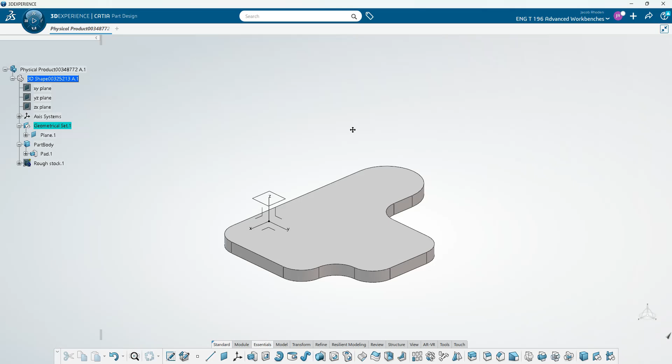This is Jacob Rhoden with part 1 of showing you how to do milling, specifically profile milling in CATIA 3DExperience.

So obviously here we have our kind of finished part. We can see all these curves on the side of this, and this is just a sketch I did with a pad. And then we have our safety plane right here in part design.

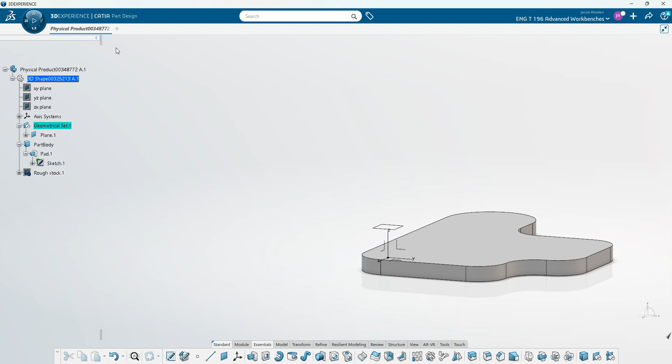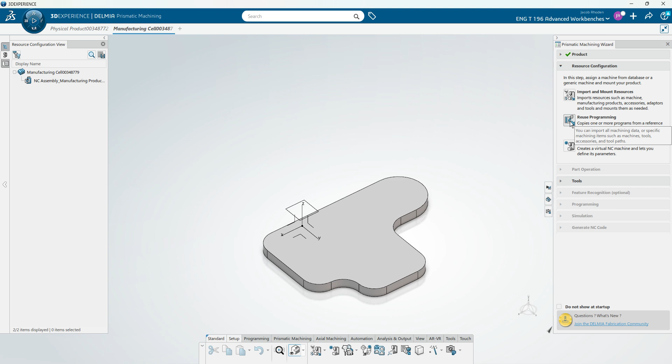Now what we're going to do, just like we did when we were doing drilling, we're going to go over to our prismatic machining. I already have it favorited, but you might have to go find it down in your apps. So we're going to open up prismatic machining, and it'll bring us to the same page as before, but since we're not doing holes, once we get down to tools and programming, we're going to have to change some things up. Starting out it's all going to be the same, so we're going to have another generic machine.

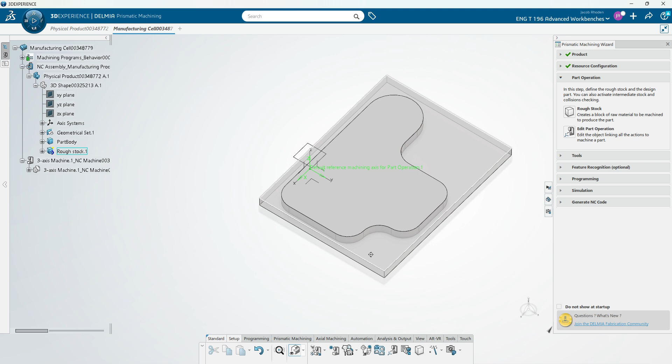And then rough stock, we already have a rough stock created, which I can show you right in here. If we do show, you can see it's the same process of creating a rough stock where you select the part body, and just for this, since we're going to be doing finishing on all of these sides, we want to make sure they're all being milled and cleaned up. I made this stock a little bit oversized so there was going to be material for this to cut, to make sure none of these sides were raw stock and not finished. So you can see I just oversized it a little bit. It's the same height, and maybe we can imagine this material has already been faced or something.

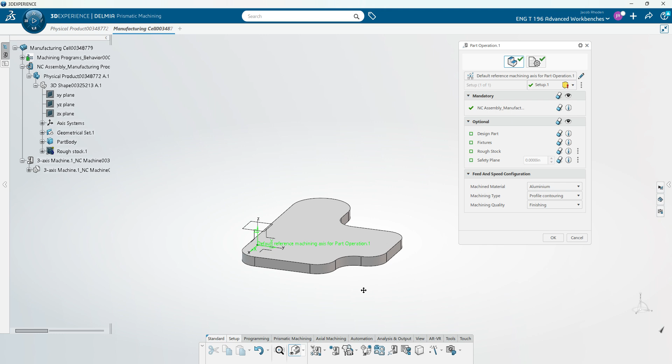So we'll hide that rough stock, but we've already got a rough stock, and we're going to do part operation. So we can see here we have our design part, which is going to be our finished part body. No fixtures. We're going to have our rough stock, which we'll select, and this is all the same process - using double click our safety plane, so we can select our safety plane right there, and got that. We're not going to offset anything.

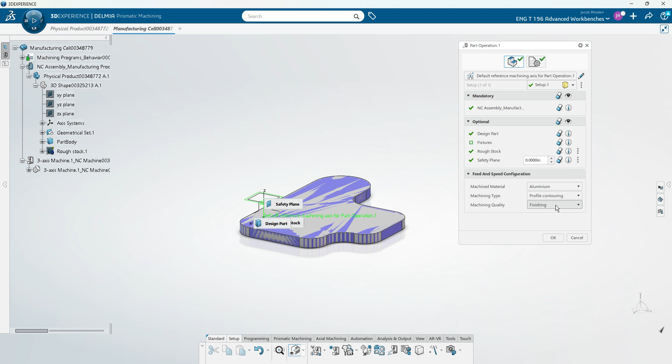For the feed and speed configuration, you don't have to put this in, but I put in aluminum. We're doing profile contouring, so we're using an end mill around the sides, and I said we were going to be doing finishing instead of roughing or anything, so this should have a bit of a nicer finish on the sides, and that'll change the speed and feeds that the program eventually runs at. So we're going to press OK here.

Then obviously we have our tools. If you already have tools made, you can go through and search them or make some. We're going to make one. Here we have our end mill. There's also a face mill, which would go and clear up the top. Conical mills for doing angled cuts. T-slot tools for doing T-slots. And then barrel mills and lens mills, just different types of end mills. We also have inserted mill holders, but for this we're just going to make an end mill.

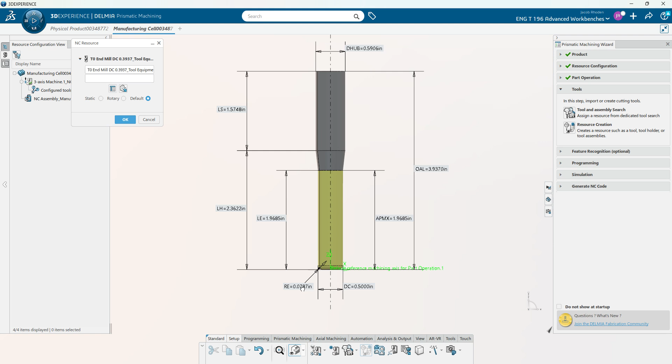And since we're not doing the inside of a hole, just like a drill where if you want to make a specific size hole you can have a specific size drill, since we're just doing the outside of this, the size isn't necessary, but I'm just going to go with a pretty common half inch size. I'm going to say there's going to be no radius on it, just to make sure we're not leaving any material down at the bottom, assuming this was cutting right down at the bottom. And then we'll just shorten this up a little bit. Since we're not basing this off of any actual drill we have, we don't need to worry too much about it.

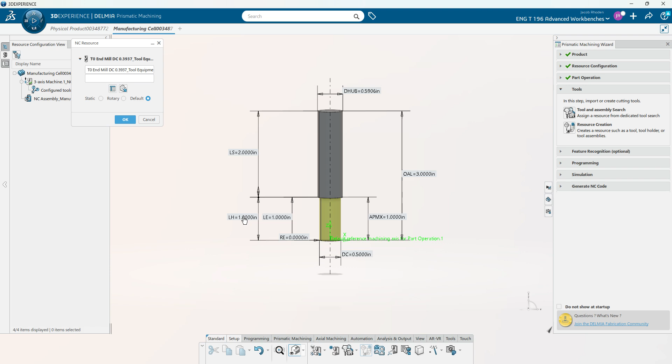Oh, 2 inches, there we go. So just create a short little end mill right here. Then you can name it if you need to, press OK, and close out the resource creation. Oh, it's manufacturing view hidden. Obviously feature recognition we haven't focused on yet, but that's all optional.

Then we're going to go down into programming, and now this is about when it gets different, other than just making a tool the same way we did previously with a different style of tool. So here, instead of axial machining, we're going to go into prismatic machining, and we're going to do profile contouring, which means that we're going to be cutting those outside sections. There's a couple of different options we have here.

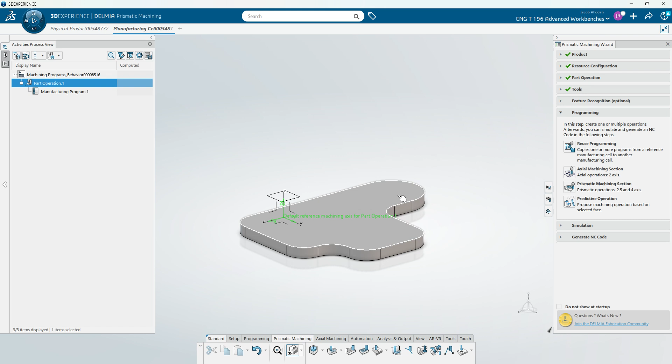Obviously we have roughing if you're taking out a lot of material, or plunge milling, which lets you just take that end mill and bring it down into the part instead of just around the sides. And then we have profile contouring, which is going just from the sides. Facing, which you would use a face mill, so maybe if you had this face was still rough stock but you wanted to finish it, you'd have a face mill come in and clean all this up.

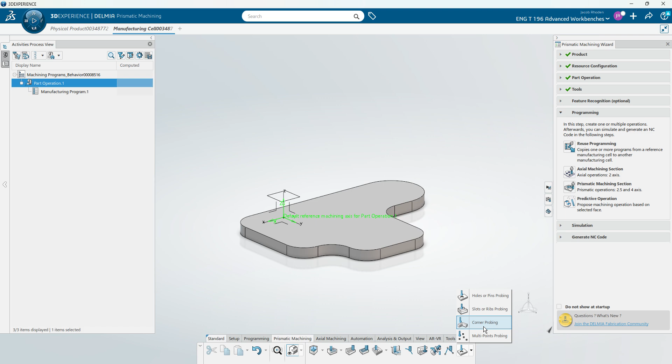And then we have pocketing for making inside pockets. 4-axis pocketing, so if you have this on maybe a rotating table. Trochoid curve following, groove milling for like T-slots, sweep helix following, and a lot of other kind of little fancy options, slots or ribs, corner, different kinds of probing. But yeah, so what we're going to do is obviously we got prismatic machining, and for this we're just going to be doing profile contouring.

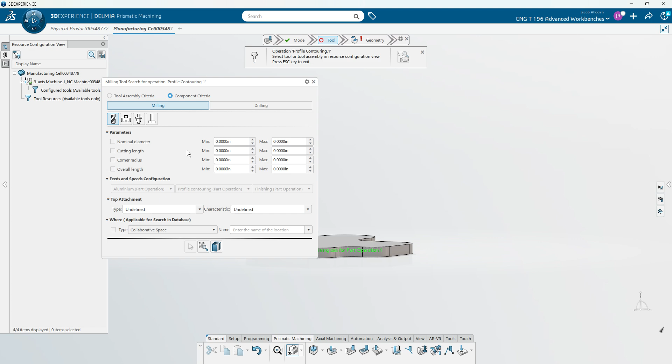Now, just like when we were doing drilling, it has the different options of the kind of milling you can do. For this, we're just going to be doing between two planes. So obviously we have our top plane and our bottom plane. So select that, and then the tool search comes up. For this, just like last time, we're just going to go select the tool we already made, since we don't have a tool library. We do not want to continue searching because we already selected our tool. So we've got our tool selected.

So automatically this is going to ask to select that bottom plane, and you want to make sure that you have your rough stock hidden so you're not selecting the wrong object. So we have our bottom. All of these are obviously optional, so you could pick limiting elements, your top plane, your limits, your boundaries, and then you can change offsets and hardnesses and everything. For this, we're just going to leave it. We're just going to select that bottom plane because it's mandatory, and everything else we'll leave optional for now.

Then, obviously, we have our tool selected already. We can see that in there. We've got our strategy, so it's going to be doing zigzag. There's helixing, one way, and concentric. There's the different types of milling, so if you're going into or away from the part, tolerances, fixture accuracy, contouring that we might be doing, percentage overlap, compensation output, all these little different options you have for, oh, do you want to do a finish pass?

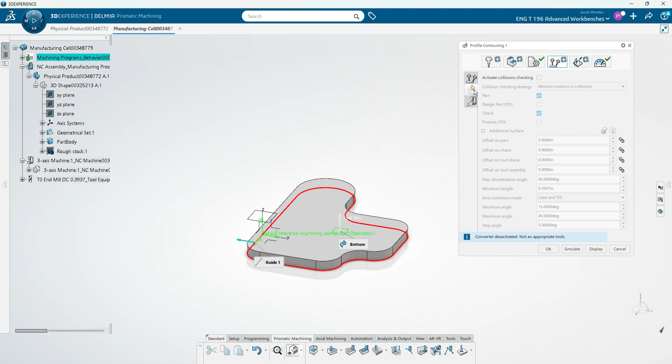So maybe you want to make sure that you're getting a really nice finish on this. You might have a finish pass to make sure that that last milling of that side is really cleaning it up. And then you have, if you're doing different axes or collisions or everything, and then our macros, which we are going to have to set pretty much just the same as last time. Obviously there's more macros in here, but we're going to be just doing the same ones as last time.

So we have our approach, which obviously we're going to be selecting our safety plane by selecting that pink plane that shows up in the window, and then selecting our safety plane. Then clearance, so we've got to make sure that we click to activate the macro. This is already set to the safety plane. Our linking retract, which will add in axial motion up to plane. Press that pink plane, press OK.

Same with linking approach. And these are the only macros that we're going to need to put in for this operation. But obviously, depending on the complexity of your part and what you're doing, you're going to have to add different macros and probably make them more complicated depending on what kind of features you might be having to try and get around.

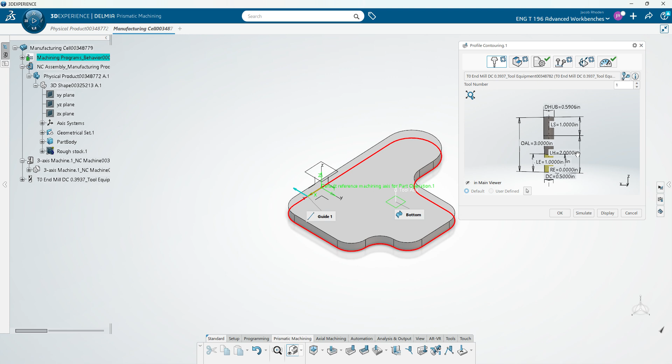And obviously feeds and speeds, when we put in that we were doing aluminum and that we were doing finishing, this automatically calculates some of those for us, so we shouldn't have to worry about it. Or you could just go into something like the Machinery's Handbook or other materials and find, okay, if this is aluminum and maybe our end mill is high-speed steel, then what feeds and speeds are we going to have to use to get a good finish on that.

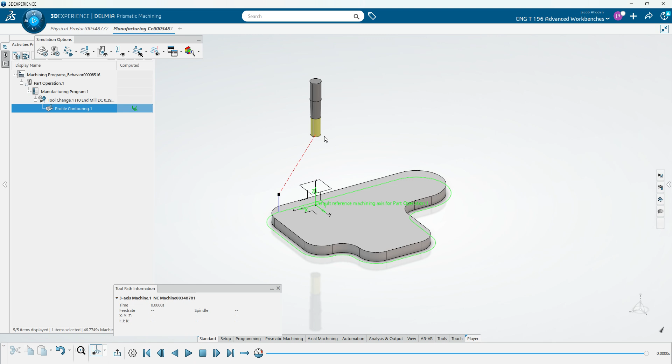So once all of these are selected, we can press simulate, and here we can see our tool path being simulated. We have our end mill right here, so it's going to bring it down and then come down into the part, and then we have this green line of where it is going to take that path in the stock to cut all this out. So we can turn the speed down before we do it, just to make sure that we can see everything happening well. We can press the go button, we can watch it come down and cut in everything.

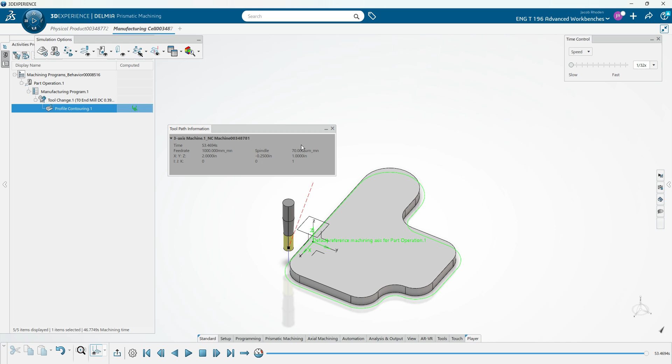And here we can see our toolpath information. So it's going to take about 53.5, 54 seconds. Then we can see our feed rates, where it's going in X, Y, and Z. And if you actually select certain parts, you can see the time go up, the different feed rates it might be doing while it's going around the corners, and the different X, Y, and Z locations it's got as it's going around through the part.

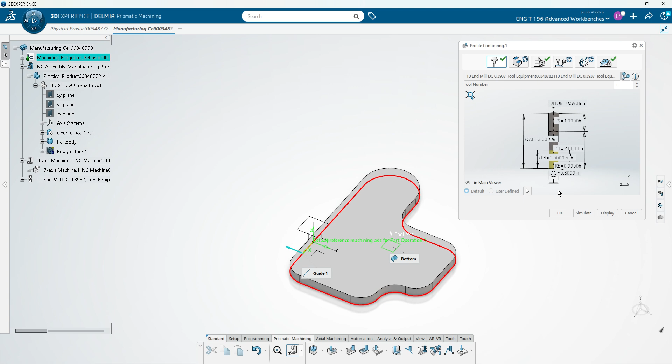So then what we can do is, I believe, if we exit out of the simulation and then press simulate, we should have, yep, here we go. So we have our simulation options menu pop up right here. And to see what it would actually look like as it was cutting, you should be able to select enable/disable material removal deposition. You can also just use the hotkey, which is Shift 8.

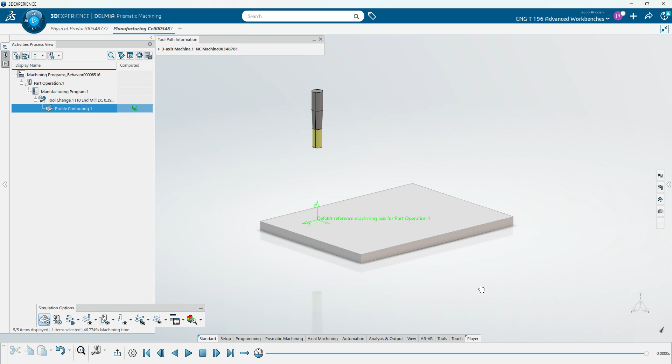And here we can see our stock. So this is the stock piece that we created, the oversized piece that we're going to be machining everything out of. Double check that your speed is still low so you can watch it go. And this is what our part's going to be made out of. So if we press go, we can watch as this comes in and cuts our part out of it. And you can see, these are our scrap parts. So this is all the waste that we'll have.

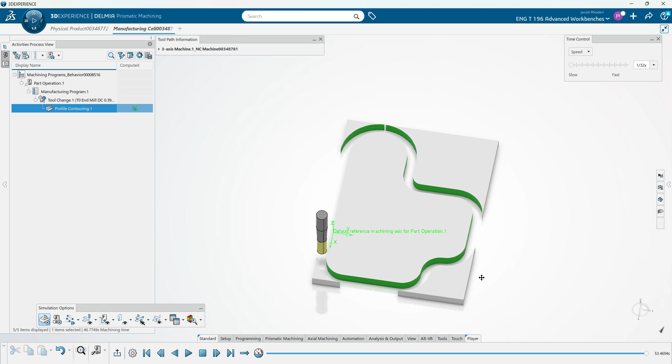And these green lines are our finished cut edges on the inside. And we can see, yeah, that's our finished part. That's what we wanted. And then you can go on to maybe put this in its own fixture and drill holes into it or drill other features you might have. And that is how you use the profile contouring in CATIA 3DExperience.